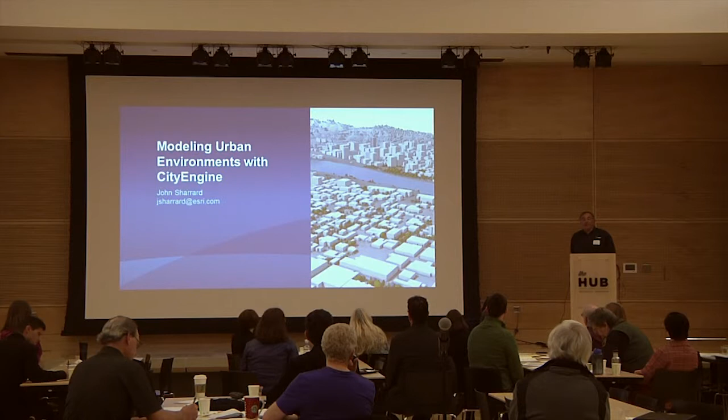So one aspect I'm going to talk about today is some actual tools. In this case, we're going to be focusing on CityEngine. It's a bit of a challenge to try to do this in 15 minutes. I'm going to give you a quick run through on the basic ideas behind CityEngine and where Esri's going with the technology.

So CityEngine is a desktop application, so you install it on your system. This is part of the ArcGIS platform. If you're familiar with ArcGIS Desktop, ArcGIS Server, or ArcGIS Online—how many folks here actively use those technologies? Okay, fair amount of you. This is one part of the platform.

This is focused on designing, or providing tools to develop scenes in an urban environment. So you can go kind of crazy and build things that may be a little nuts, but you certainly can build some very realistic scenes and do a significant amount of analysis with the technology.

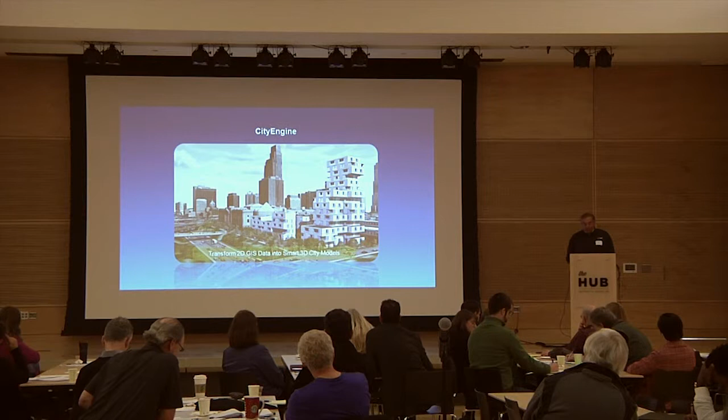CityEngine is all about procedural modeling. So what this talk is about is taking inputs, simple geometries, and quickly rendering those into a complete scene, in a three-dimensional scene.

So the way we do this is we start with a base geometry. And in most of the examples I'm showing here today, I'm talking about buildings, but this also works for street furniture, vegetation, and other things that would complete the scene. But in this case here, we're going to be working with footprints or lot lines. We're going to be applying rules to them.

But what we end up with is a process where we're starting with simple geometry, applying some rules to break it into different components of the building in this case, and we can iteratively alter the rules to get a more realistic model at the end of the process.

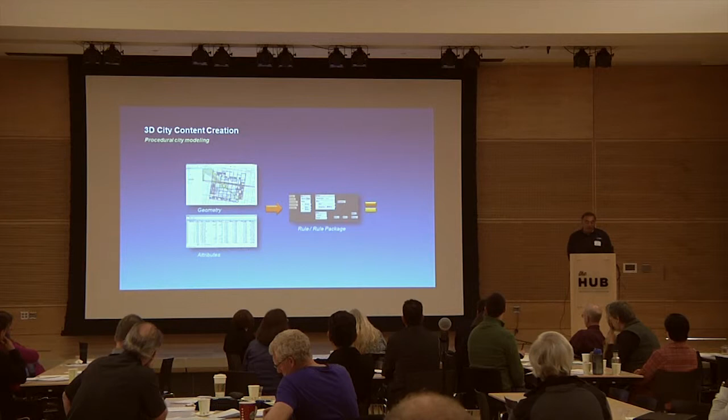So the process from a GIS standpoint, if you're an existing GIS user, is you're working with existing geometries. In this case, we've got a screenshot from ArcMap where we've got some building footprints, and it's difficult to see, but there's also vegetation and street furniture geometries. These are simple, mostly 2D geometries. There may be some of those geometries, say the buildings, that have the height as part of the attributes. Attributes are a big part of making the procedural modeling work.

If you have attributes that describe something about those geometries, in the case of building footprints, perhaps we've got how many floors there are, how tall it is, or for vegetation, maybe what kind it is - is it a shrub, is it a tree, and so on. All of that could be described in the attributes. And when we have those geometries and the attributes, we apply those to the rule package, and what we end up with is the creation of a finished scene.

It's not all that quick and easy to do just like this, but you're usually going through an iterative process where you're adjusting the model as you go forward. Once you have the model, you can go back and change individual pieces of it.

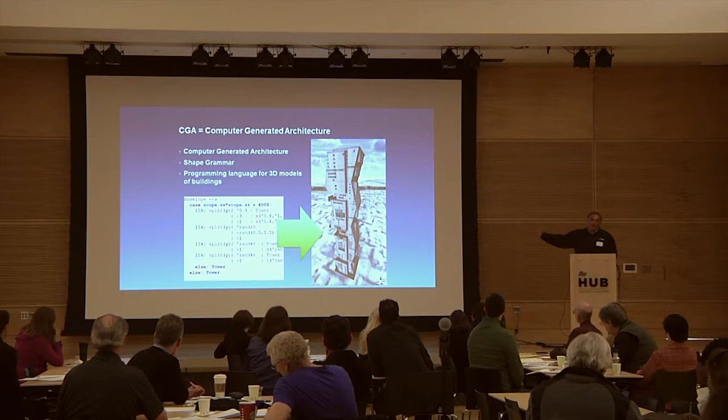So this is the underlying language behind the system. I'm not going to get into great detail about the section on the left that gets into what a CGA rule actually looks like. For the most part, as an end user, you're probably not going to spend a lot of time dealing with the rule sets. But for purposes of explaining how it works, we're going to go through a quick demonstration here.

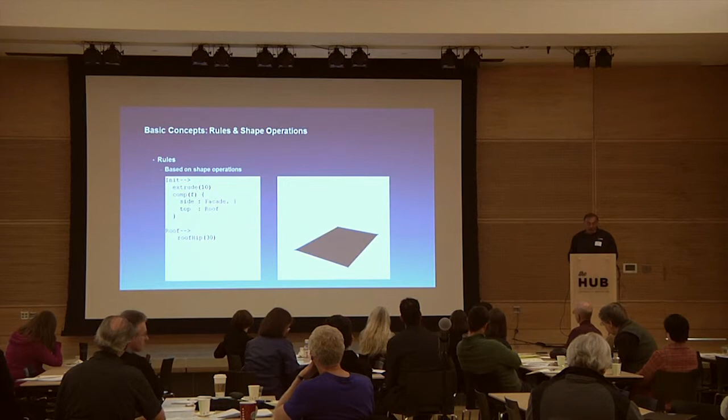We've got a footprint here on the right. We're going to apply a simple rule to it to extrude that into a block. You can see up there on the left it's highlighted. There's the extrude function with a value of 10 in there, which in this case is probably on the order of meters. That 10 value may have come out of the attributes that were carried with the simple geometry.

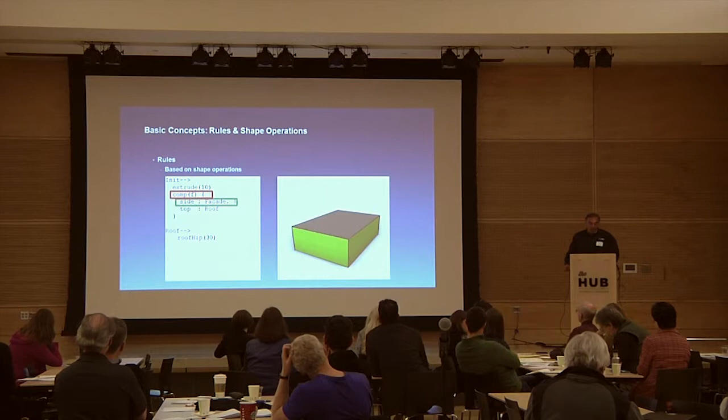So we have that block, but we want to break that into components. If you look at this box that's sitting there, there's 6 sides, one of which is hidden, but there are 5 sides around it, the 4 sides here plus the roof, that we can individually deal with.

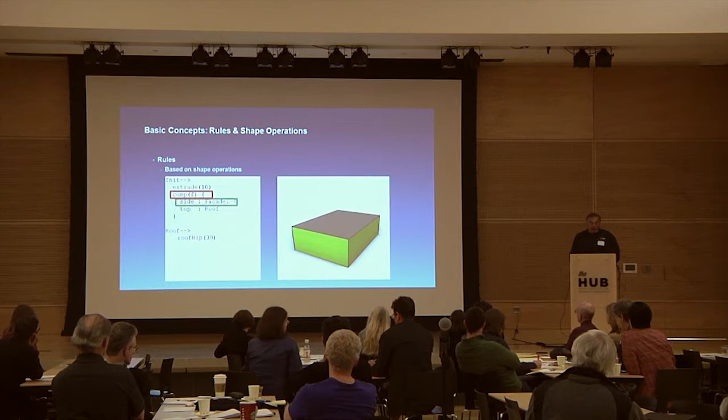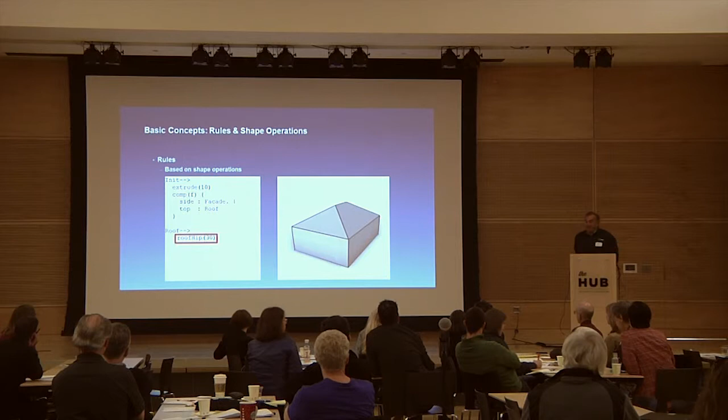As we step through these, expanding the CGA rule, we're adding more and more detail to it. So we took the roof and we said, well, we're going to put a hip roof on it. So that's the essence of how this works.

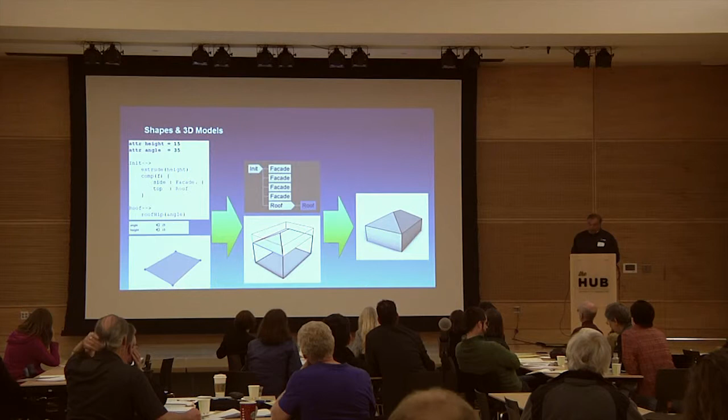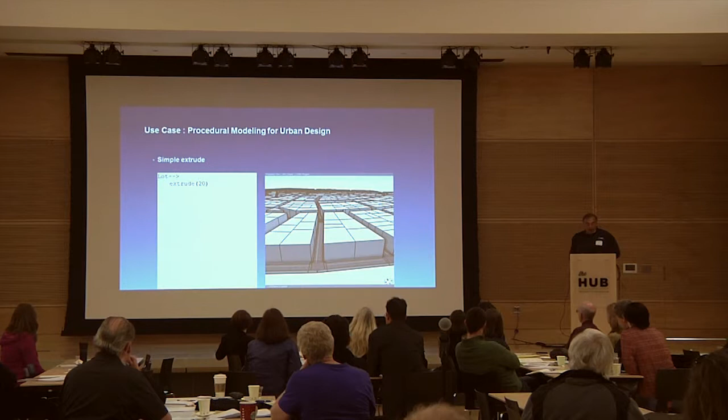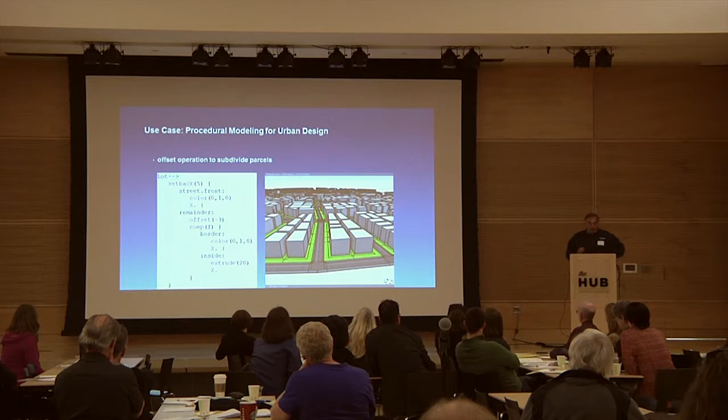So let's take this beyond a single building into multiple buildings. Here we've got lots, and we have streets here, and we're going to start applying some rules to it. So we went and do the extrusion here, we'll do a setback from the road, we'll break each of those individual pieces up, offset into individual parcels, and we'll apply some texturing onto it.

The texturing is a bit interesting here. We've got a side of a building, and it's been divided into floors, and then horizontally it's been divided into different sections. To each of those sections we apply some sort of image texture file onto it. So the end result is we're putting perhaps a real picture of a window in the spot where a window would be on the model. As you expand the model dynamically or through changing the height attribute, it's going to replicate that particular part of the facade throughout the building.

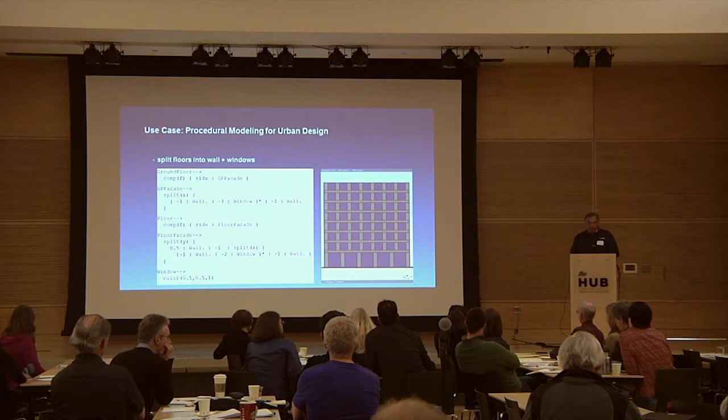As we talked about earlier about the reporting ability, here's just a screenshot showing that we can deal with the individual floors. We've got some report defined for it for gross floor area.

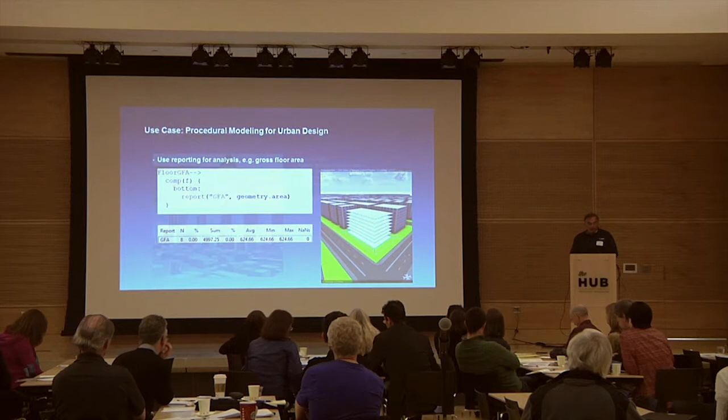Now, most of the examples that I've seen in our user community are actually a mix of these procedural models, often with an as-built model. A lot of what we see with CityEngine is people developing what-if scenarios around some particular city block of interest or building of interest, where they may have an actual model that they've imported out of something like SketchUp or AutoCAD. So I will see a mix in CityEngine of the procedural models as well as the as-built models.

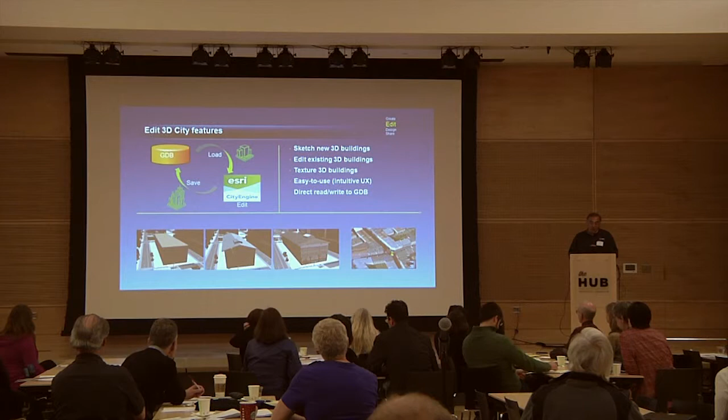In terms of the workflow, going back between traditional ArcGIS Desktop and CityEngine, you can read and write interactively into a geodatabase with CityEngine. We also provide a lot of the design tools for gross floor area, density. If you change those parameters, you can change the resulting model. So here on the right, we've increased the density in this particular city block, and it changes the generation of the procedural models.

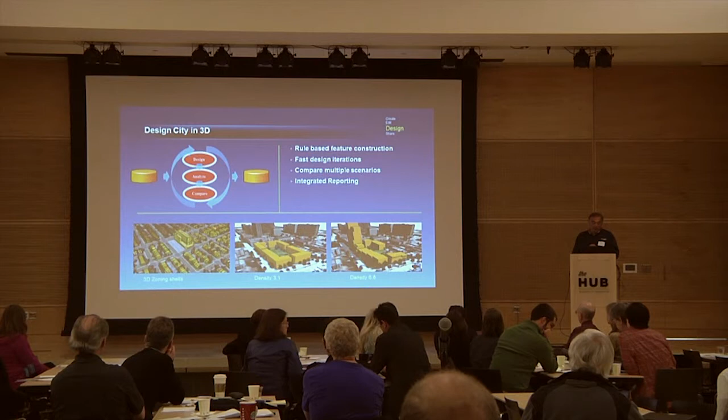I'm going to show a little bit about this later. This is exporting into a web environment the work that you've done inside CityEngine. I've got an example here in a little bit.

And just a few things about CityEngine. What's going on right now is we have added additional libraries for supporting your work. So there are now vegetation libraries that you can work with. These are essentially rule sets, things to support zoning and general buildings.

A new thing I want to point out is the 3D Cities Information Model. This is a new environment, or a new schema that you can use. It's available now for building your buildings and also your legal environments surrounding them.

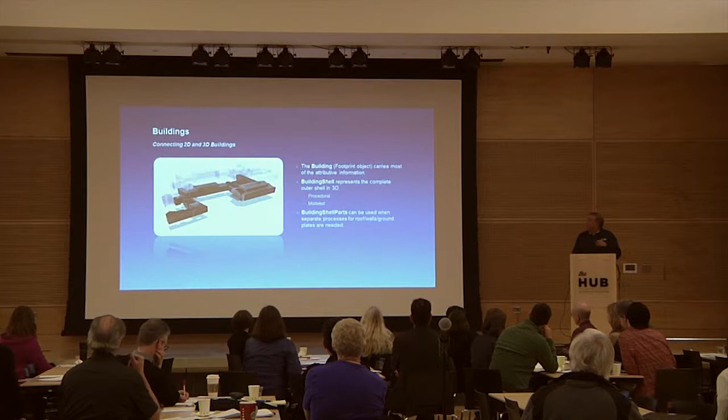I'll give a quick overview of these since we're running out of time. I've already talked about the buildings. Part of this model is also modeling the building interior, as well as other supporting structures like fire hydrants, bike racks, and things like water, sewer, and stormwater.

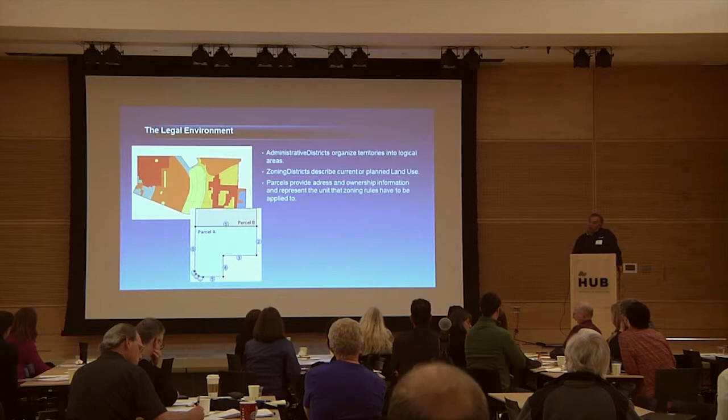And also the legal environment. Here we're talking about zoning and parcels. All of these things are part of the city information model, as well as typical land cover built things. Here we're showing geology, wind, weather, and atmosphere.

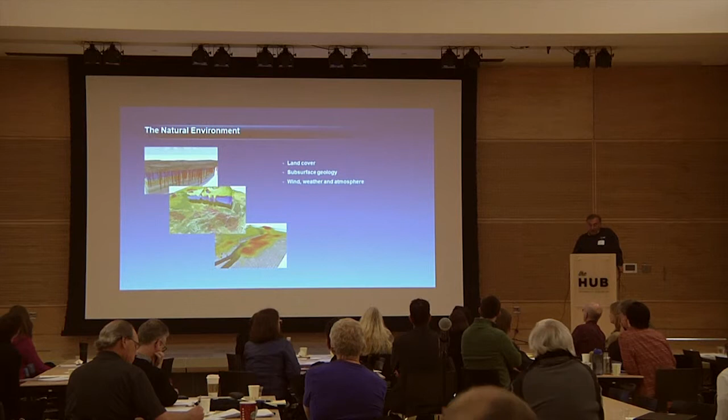This is a big year for 3D from Esri. We're doing a lot of work extending our technology to support additional platforms. Certainly mobile, which has now become the dominant way people get information from the internet, is a big player in our solutions. So we're working on ArcGIS Pro, the next generation of desktop technology. It's currently in beta and will be available later this year.

This will come to you as another application in the ArcGIS desktop install. You might be familiar with ArcMap and ArcCatalog—there's this new one on the horizon that you'll have access to pretty soon. The new ArcGIS Pro is now 2-dimensional and 3-dimensional, so you'll be able to work in those environments with multiple maps and 3D all at the same time.

I'm going to put together a list of resources. There are some excellent videos that I'll steer you to if you're interested in this. I think I'll skip ahead here because I do want to show an actual demonstration.

Let me go ahead and bring this up. What we're looking at here, I'm going to let it play. This is a web scene generated inside of CityEngine. What you're looking at is not a video—this is an actual CityEngine scene, a compressed file that's been downloaded into the browser that you can interact with.